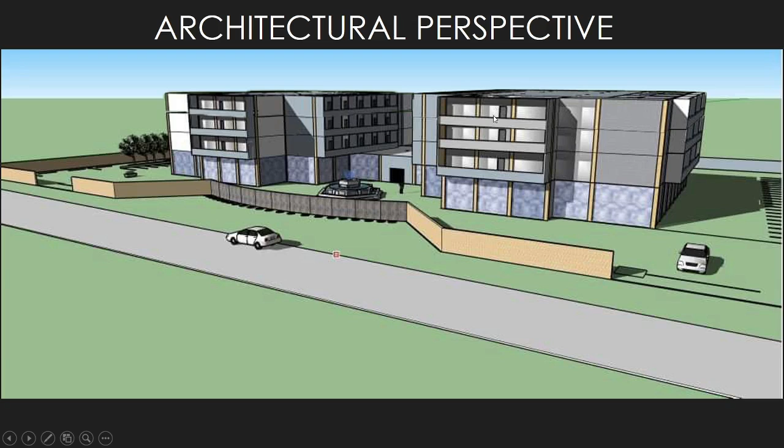So the ground floor, well, you cannot see it right now because it is shown outside. The ground floor is practically for commercial purposes. So there are stores, there's a pharmacy, there's a gym, and etc. But when you reach the second, third, and fourth floor, this is all residential. This is a standard condominium build of a structure.

So talking about the location, this building, our proposed building, is located on Diversion Road, Talomo, Davao City. So as you can see this, the vicinity map, this is the site right here. This is the road, the Diversion Road on Davao City, and here's the General Douglas MacArthur Highway. So these are the nearby landmarks on the map. On the right side here is a zoomed in version of our condominium. So these are more specific landmarks that are near the lot area.

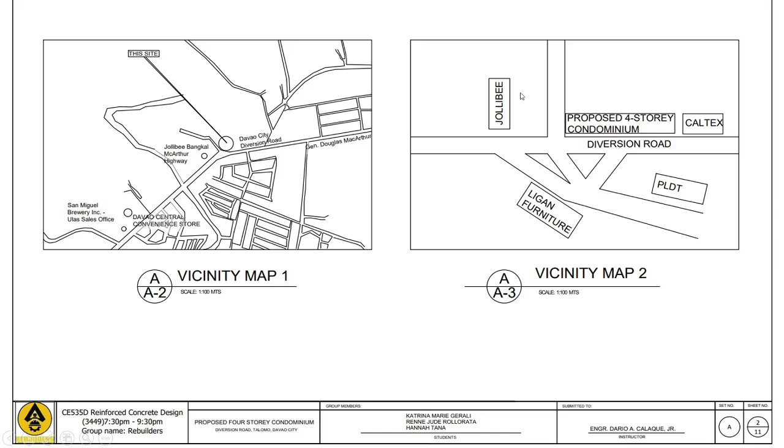So this is the site development plan. So as you can see, our lot area is actually somewhere between 2,000 square meter. We have a guardhouse here at the front and at the back. This right here is the driveway on the edges, and this is the parking area. These lines. This is supposedly a fountain, and this is the dedicated generator area. And this shaded part right here is our building.

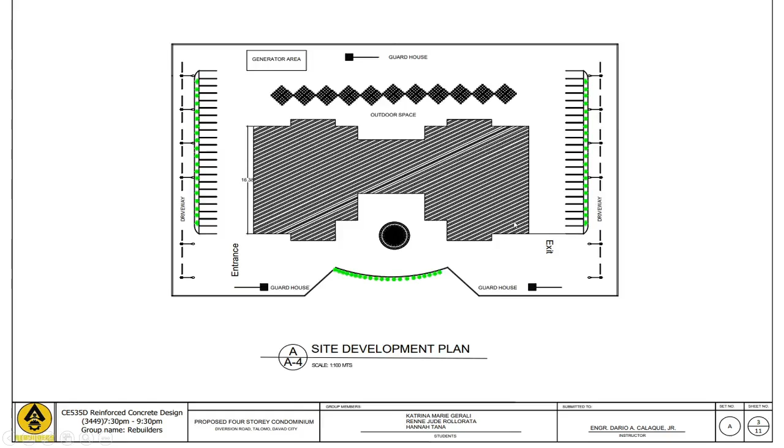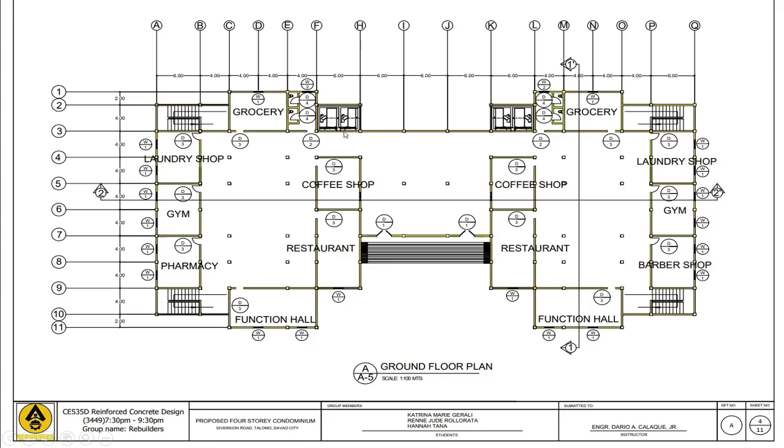So moving on to the ground floor plan. So this is the floor where it is serving the commercial needs of the people. So as you can see, there's a function hall, there's a restaurant, a coffee shop, some groceries, a laundry shop, a gym, a pharmacy, and a barber shop. As you can see in the design of our structure, it is actually symmetrical. So the left side is built and is designed symmetrically to the right side. And this over here are the stairs. There are 4 stairs. And these 2 spaces are dedicated for the elevator.

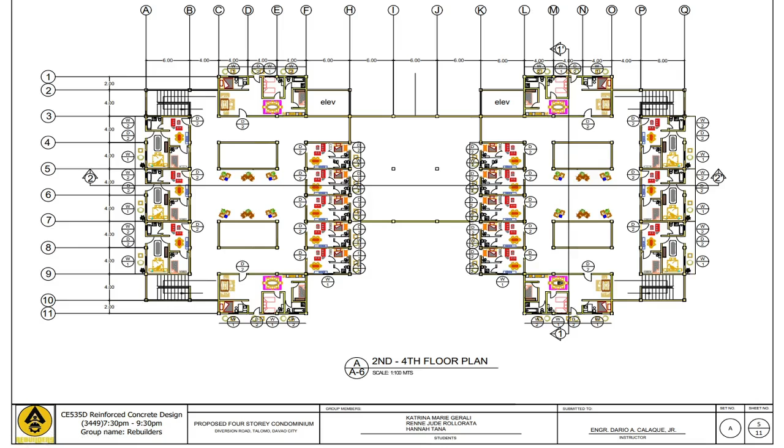So for the second to fourth floor plan, this is the residential area. So there are 5, 6, 7, 8, 9, 10. There are 10 rooms here, and there are also 10 rooms here since this structure is symmetrical. And this is the elevator. There are the stairs. So there are balconies. So this right here is a balcony. Right here. And there's also a balcony for the 5 adjacent rooms here. Here and here. So this is the same from the second to the third and to the fourth. That's why it is just compiled into one sheet.

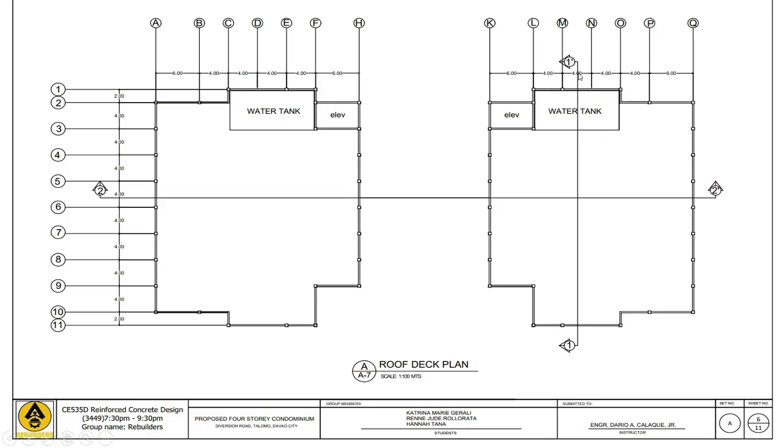Next is the roof deck plan. So as you can see, there is almost nothing here, except there's only the two spaces. These are the elevator shafts. So the elevator actually leads all the way up here. And as you can see, adjacent to the elevator wall are the water tanks. And now, as you can see, there are arrows that cut a certain section of the building. Why is that? Well, that is for the cut sections that I'm going to show you in the next few pages. So for right now, I'm going to show you the elevation.

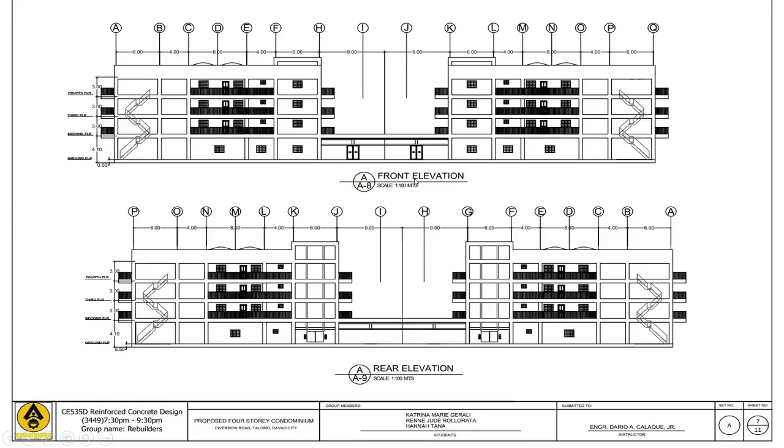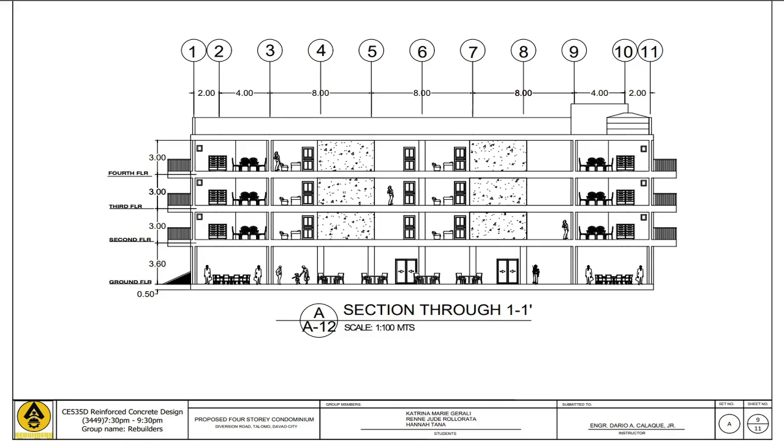Next is the cross section. This is the section of the longer part of the building. So as you can see on the ground floor, this is purely for commercial purposes. As you can see right here in both edges, these are actually the gym. These are the restaurants. And these are just the lobby, an open space for people. And for the second, third floor, it's all the same because it is residential, it is a condominium.

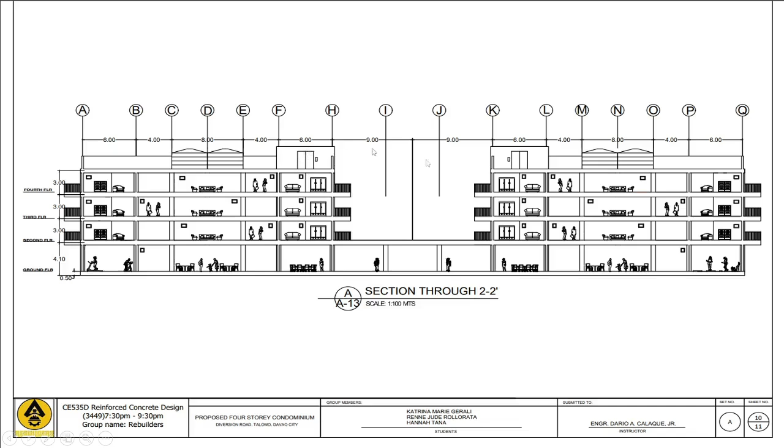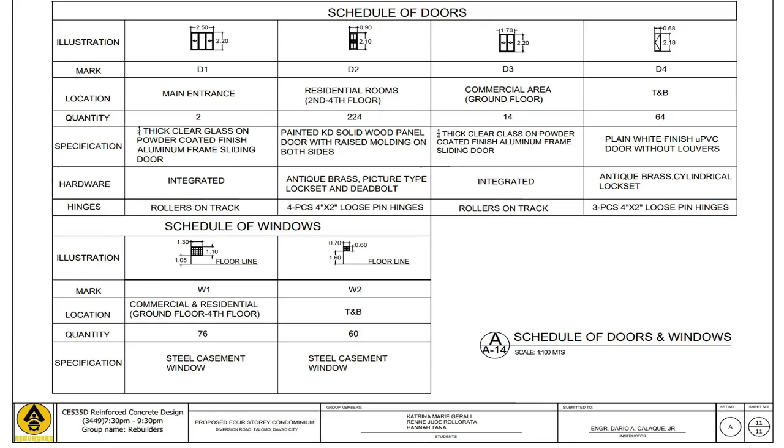So that right there on the top, that is the elevator, the top of the elevator. And this right here are the water tanks. So right now, this is the schedule of doors and windows. So according to our design, we have 4 different door designs and 2 different window designs.

Next, these are the materials that I've used. So I have created a custom 3000 psi reinforced concrete, and these right here are the following descriptions of the concrete that I've used.

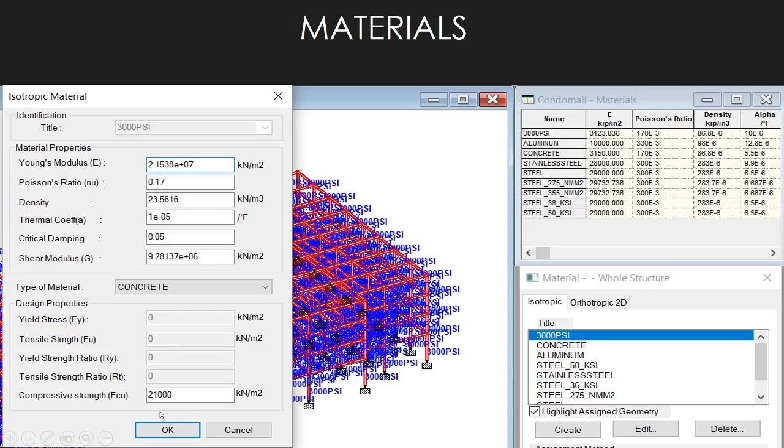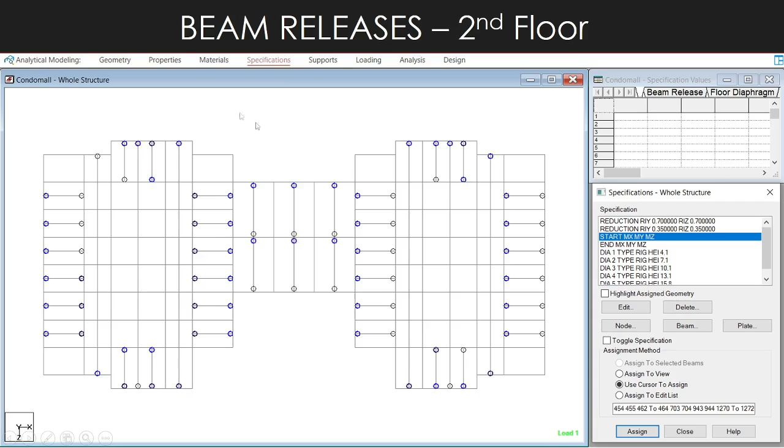And then for the third to fourth floor, it is practically the same. The same location of the beams and the same point of releases are placed for the second to fourth floor.

So part 2.2 talks about the loadings that we've put in our STAAD model. So these are our primary loads. So there are 11. The first 4 are the seismic loads. So a seismic load for the positive x-axis, for the negative x-axis, for the positive z-axis, and for the negative z-axis. The fifth one are the dead loads, while the sixth are the live loads, but this one is for the entire structure, which means that in this particular section, all the possible slabs on the building have a live load on them.

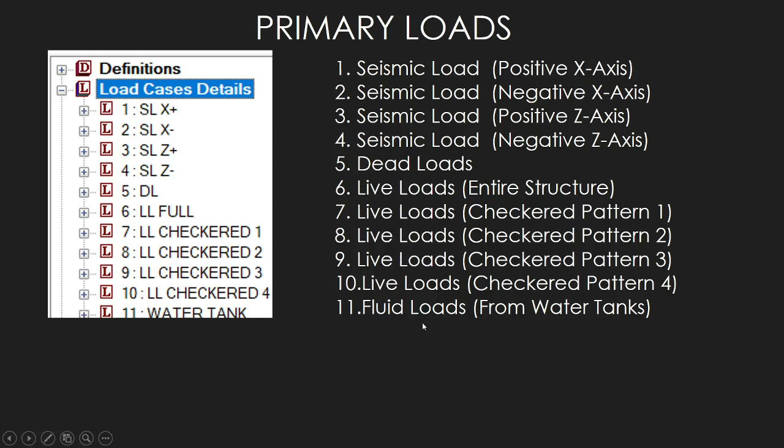While number 7 to number 10 are all live loads but are in a certain alternating pattern. I have labeled this as a checkered pattern. So there are 4. And the 11th load is a fluid load, which is generated from the water tanks that we have placed on the roof deck.

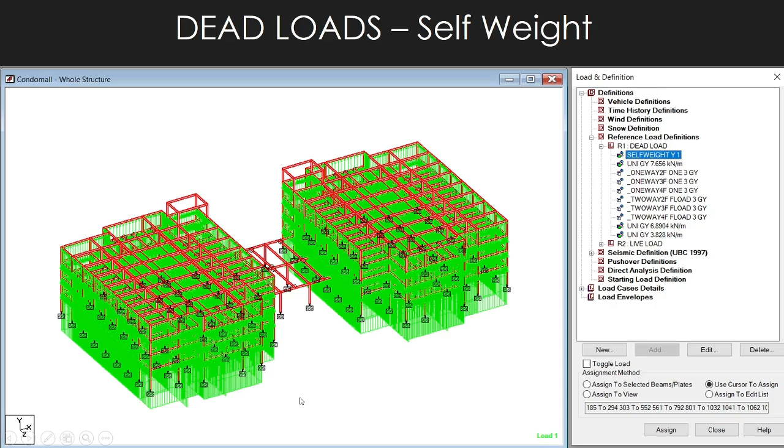So of the 11 primary loads, let us first talk about the dead loads. So the first dead load right here is the self-weight. This self-weight is applied to all the structural members on the STAAD model. The second type of dead load is a superimposed dead load. This one is on the slabs. So this is only placed from second to fourth floor.

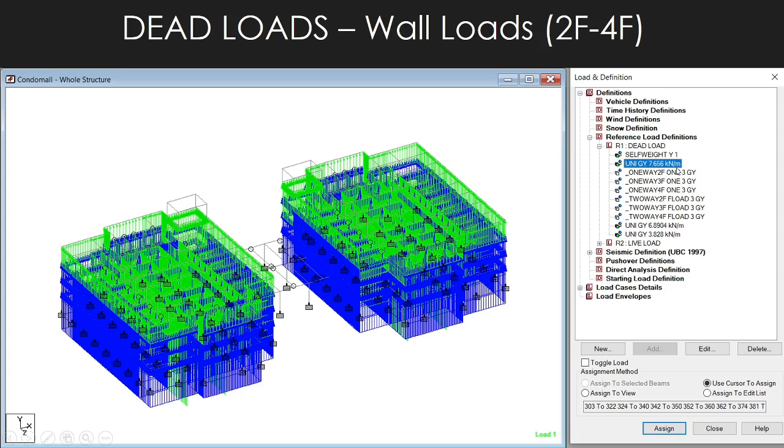And then the next dead loads are the wall loads, which are from second floor to fourth floor. So these wall loads are concentrated on the beams where there is a wall above it. So as you can see, the intensity of the wall load is 7.656 kilonewton per meter.

So the next are the dead loads, the wall loads that are dedicated at the roof deck. So as you can see in the blue arrows here, these are the beams at the edge of the roof deck, where there is a little bit of wall standing above it.

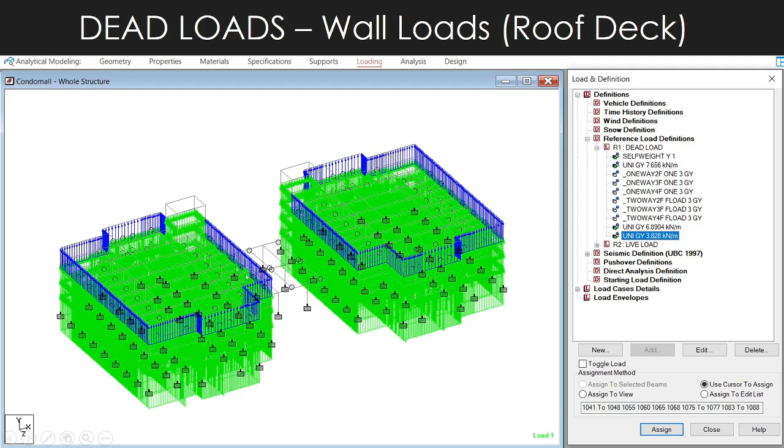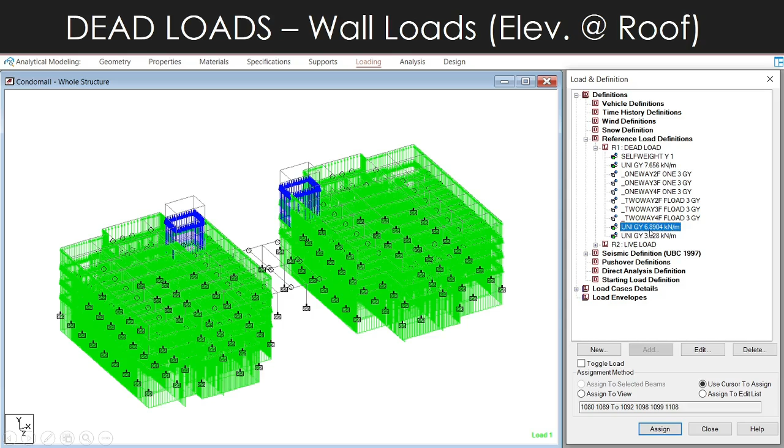And then lastly, the wall loads based solely on the elevator shaft at the roof deck. As you can see, these 4 rectangles. And you can also see their corresponding intensity. This one is 6.8904 kilonewton per meter.

So now that we're done with the dead loads, let us proceed to the live loads. So the first live loads I'm going to show you are the full version, where all the area of the building where there can possibly be a live load that can be placed, this is all considered. Now, as you can see on the table below, this is from NSCP 2015. This is the reference that we've used in determining the pressure generated by the live load on that certain slab.

So as you can see, for all the residential area, so for all those slabs that belong in the individual rooms of the tenants, we are using 1.9 kilopascal pressure. And to the roof decks, we have assigned 1.9 kilopascal as a pressure also. And for the rest of the area, on the open spaces, on the lobbies, on the corridors, we will be using 4.8 kilopascal.

So for example right here, this particular slab, this line, this is mainly on the corridor, on the public area. So we have assigned 4.8 kilopascal here. While on this group of slabs, these are all within the residential rooms. So we have only assigned 1.9 kilopascal here.

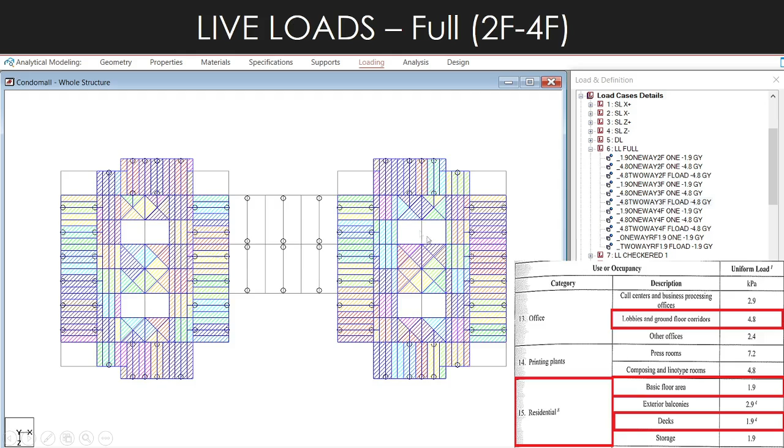As you can see, there are certain empty spaces. This right here is where the stairs are supposed to be, these 4 spots. These 2 were for the elevator. And the 4 right here that are in the middle, this is actually a partition where it is covered by walls, and there is no slab here because technically no person can set foot in this area since it is enclosed with a concrete wall.

The next live loads that we're going to tackle are the checkered pattern. So it is fairly impossible for me to show you all the possible checkered patterns for all the possible floors. So we have only taken a certain group of floors so that we can just show you the comparison. So based on the design of our checkered pattern, every floor actually has an alternating pattern of loads on their slabs. So this one is for the 2nd floor and the 4th floor. The next one is the 3rd floor and the roof deck.

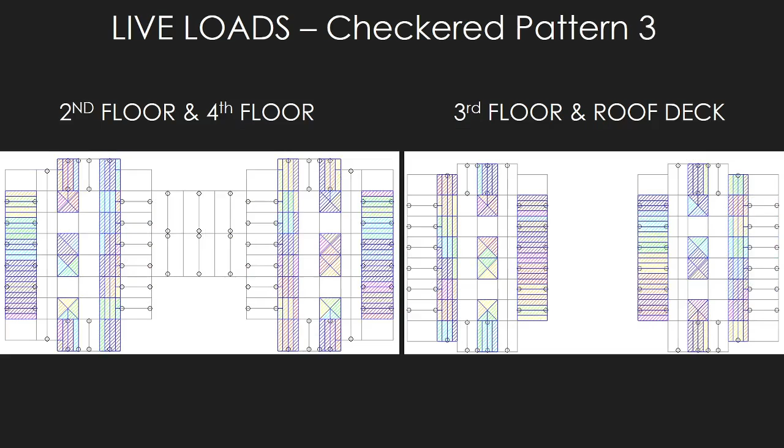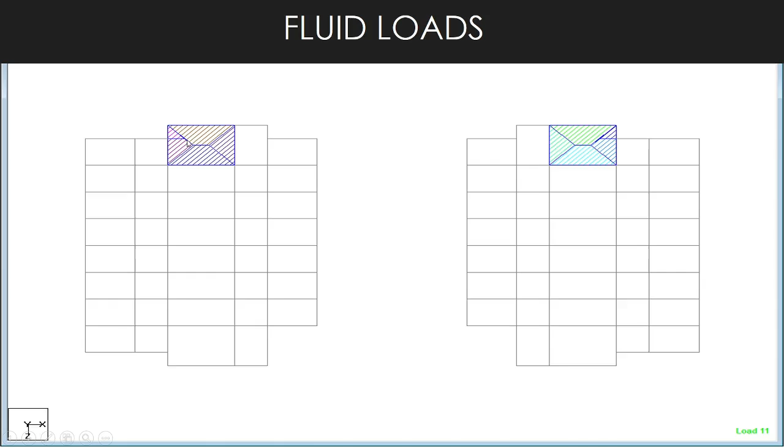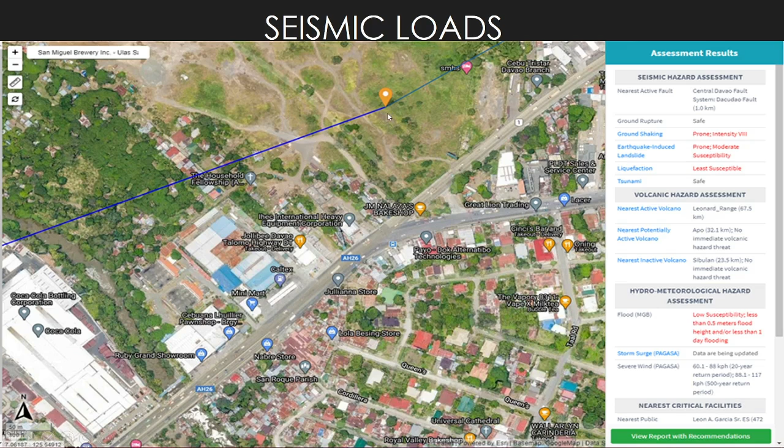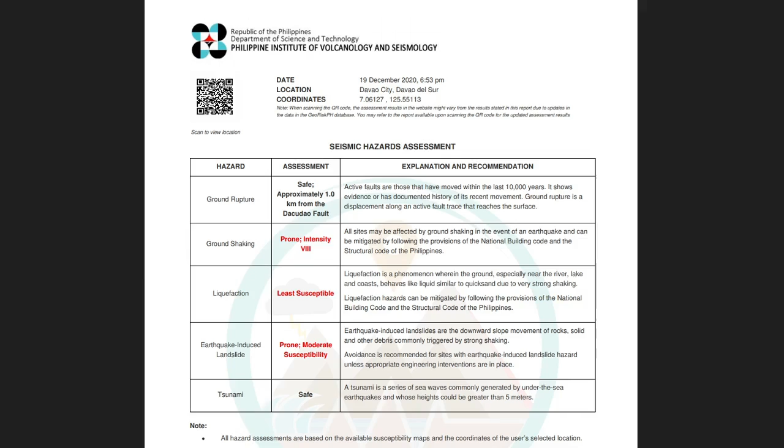So the next that I'm going to talk to you about are the seismic loads. So this is the actual area of the site. We used Hazard Hunter as a reference. So this is what the coordinates have shown. And these are the hazard assessment reports from the Hazard Hunter. So you can see that our site is approximately 1 kilometer from the Dacudao Fault. These are the rest of the assessments.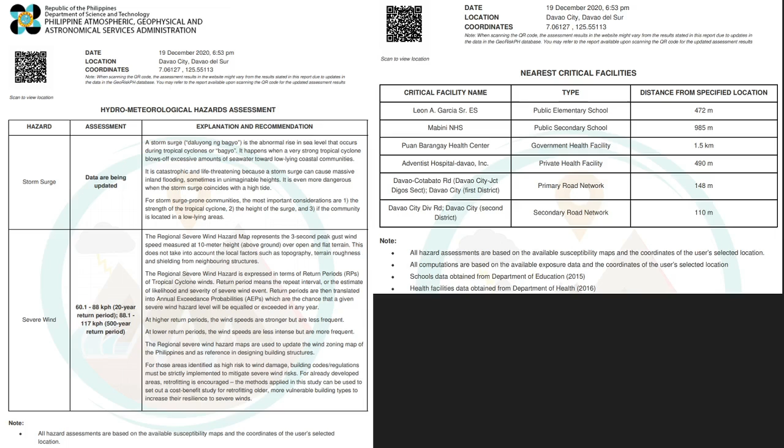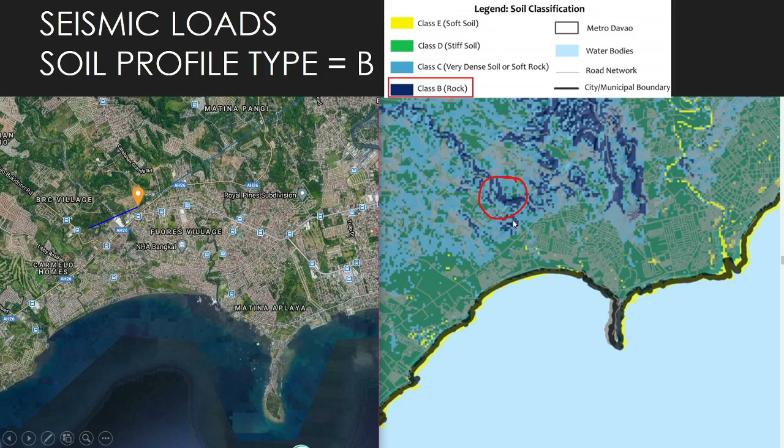Okay, now for the soil profile type. Now we used the Metro Davao earthquake model to reference the location of our site to the map that was in the earthquake model. And after a careful observation, we have concluded that our site is located on a Class B classification of soil. So these right here are the following values that we have taken from the UBC 1997.

So our site is in seismic zone 4, and this is the table taken from the UBC. And then the seismic importance factor is 1, since we classify our building as a special occupancy structure. Our seismic source is type A. And then these are our near source factors, NA and NV.

And then just cross-referencing, since we have a seismic source type A, we'll look here in the table, and since we are only 1 kilometer away from the closest fault, we will use this part on the table. So NV is 2.0, NA is 1.5.

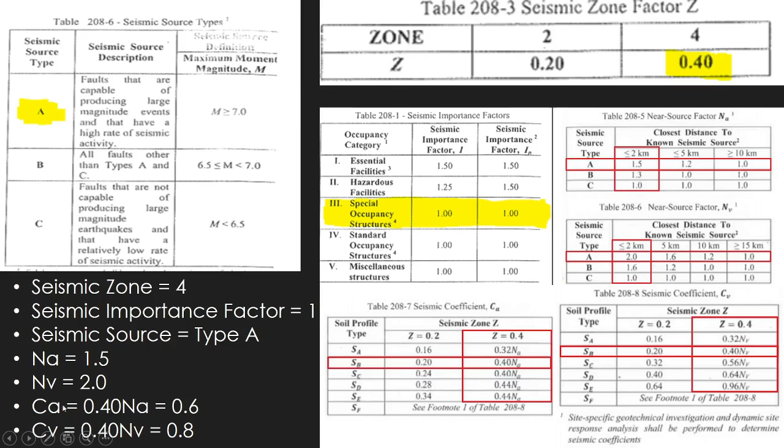And then for the seismic coefficients CA and CV, we will be getting our value based on the soil profile type. So since our soil profile type is B and our seismic zone is 4, this is the value that we should be using for the CA and CV. So calculating that, it turns out to be 0.6 and 0.8 respectively.

So now next is the selection of the earthquake force resisting structural systems. Since we will be using special reinforced concrete moment frames, the response modification factor R is 8.5, and the amplification factor omega O is 2.8.

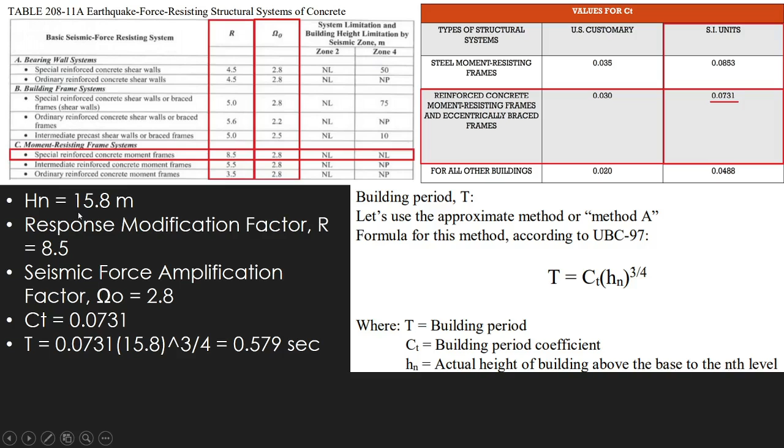And then for the value of our building period coefficient CT, since we use reinforced concrete moment resisting frames and we are using SI units, this is our coefficient 0.0731, and this is the formula of the building period. Using this formula, we can calculate our building period. By the way, H sub n is the actual height of the building above the base to the nth level, and we have counted that as 15.8 meters. So the building period is 0.579 seconds.

Next, we will do a manual solving for the base shear. For the total design base shear, this is the formula. These variables right here, we already have the values. For the W, the weight, I have calculated that the weight per floor sums up to be 84,483.56 kilonewton. Plugging that into the formula, we have found that our base shear is 13,732.977 kilonewton. And that's not yet the final answer. We still have many assessments to do.

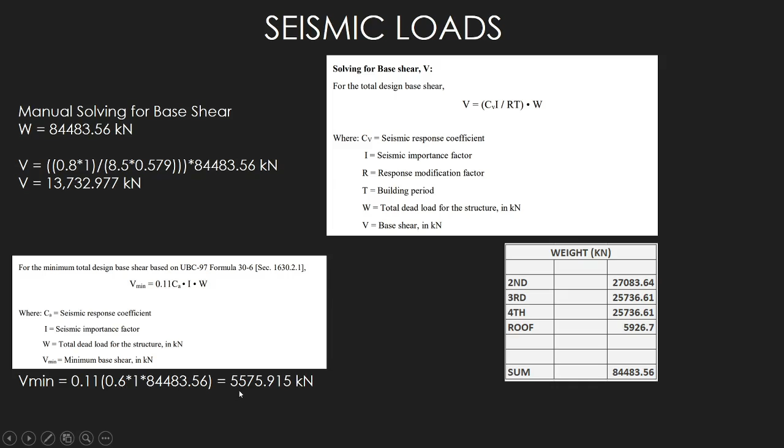Next we will solve for the minimum base shear. This is the formula, and once again we plug in the variables we already have. Thus, we get a result of 5,575.915 kilonewton. Next is the minimum base shear on zone 4. Our answer is 6,361.115 kilonewton. And for the maximum base shear, it is 14,908.864 kilonewton. In conclusion, since our calculated total design base shear falls between the minimum base shear on zone 4 and the maximum base shear, this value governs.

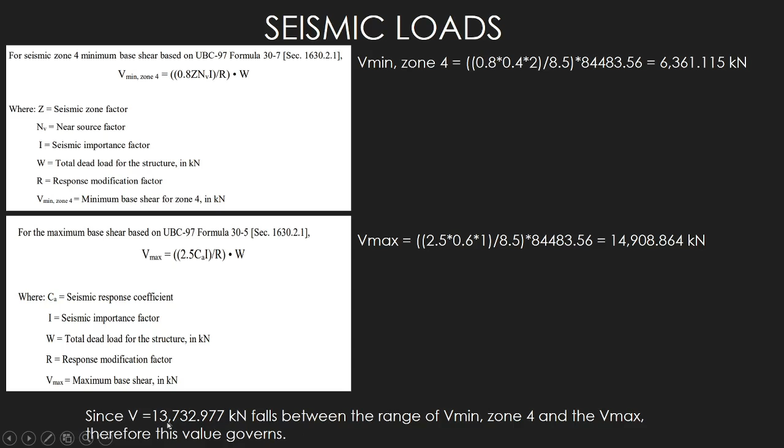Now we are going to compare that to the base shear value from our STAAD model. According to our STAAD model, our base shear is 8,984.467 kilonewton. Compared to the one we calculated, there is a difference of 4,748.51 kilonewton. Since 8,984.467 falls inside the range of the minimum base shear on zone 4 and the maximum base shear calculated before, this value is also valid. The value from STAAD and the one we manually solved are different, but they all fall inside the range of validity.

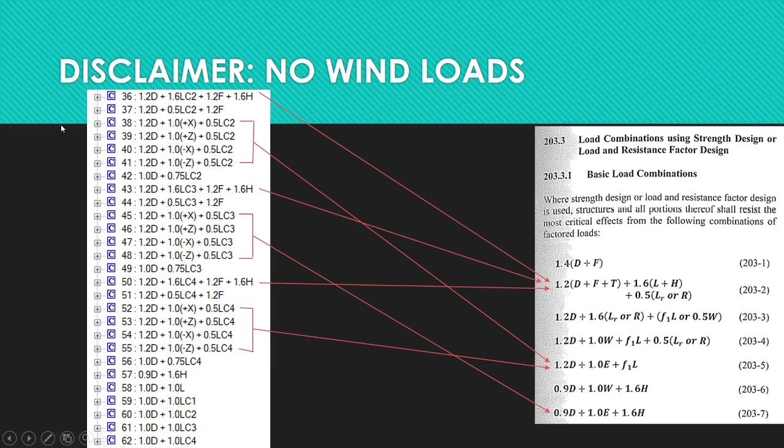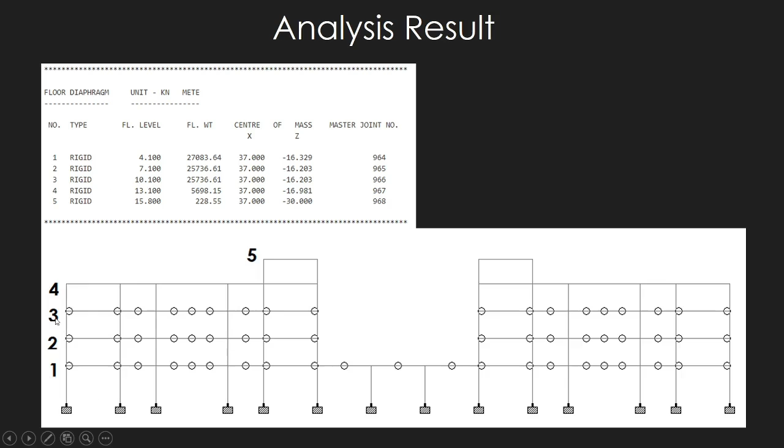Part 2.4 is the analysis of the result of our STAAD model. This is our analysis result. When we ran the analysis, there were 0 errors and 0 warnings, which is good. When we view the output file, we can see that I've placed 5 floor diaphragms, one in each floor level: 1, 2, 3, 4, and 5. And in our soft story check in the output file, it concluded that no soft story was detected. So it is all good.

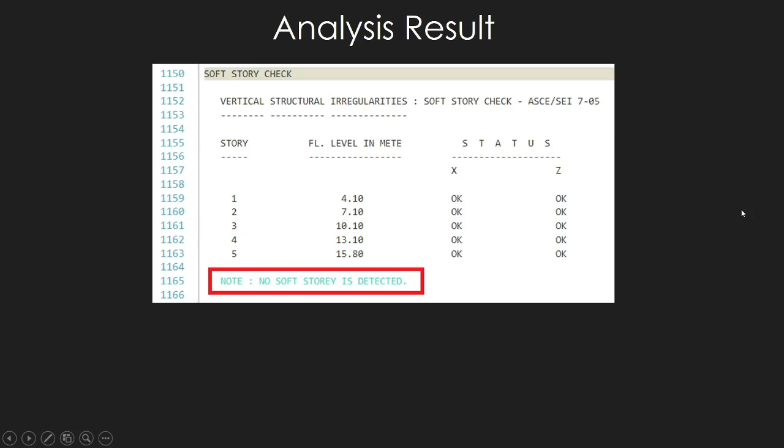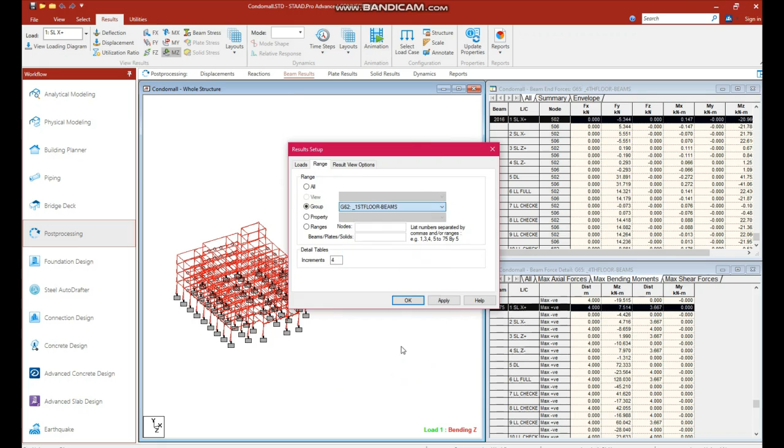We have just finished discussing everything about our STAAD design. This time we will discuss our design of beams. To design our beams, first we go to post-processing after running our analysis and go to our beam results. Now to show only our second floor beams, we apply the group that we have assigned for that, and we go to beam results and summary.

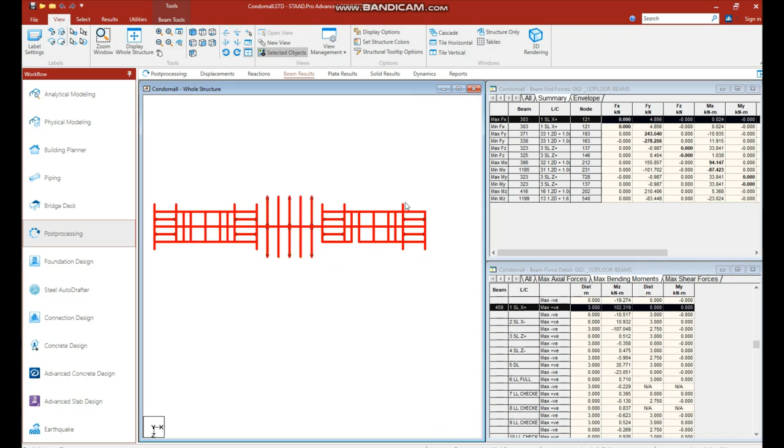So this shows only our second floor beams. We have chosen beam 416 because it has the maximum moment of all; we choose the greatest moment in the summary. From beam 416, we have this data right here, copied from the STAAD editor. It automatically tabulated the left, middle, and right maximum moments, as well as the left and right shears, and gave us a summary. So we just input the maximum moments for left, middle, and right over here.

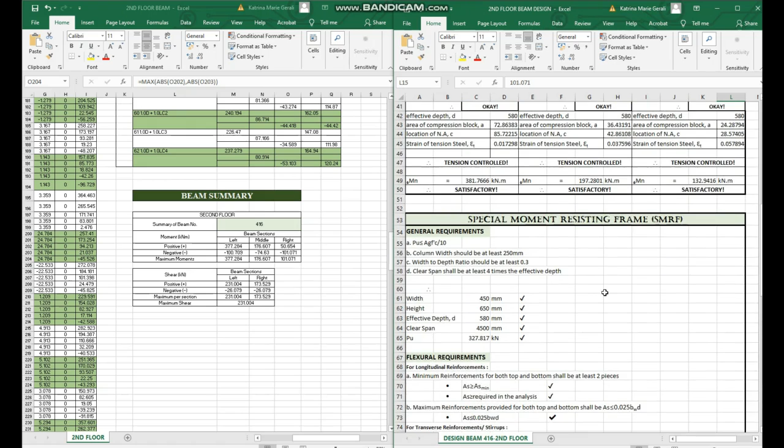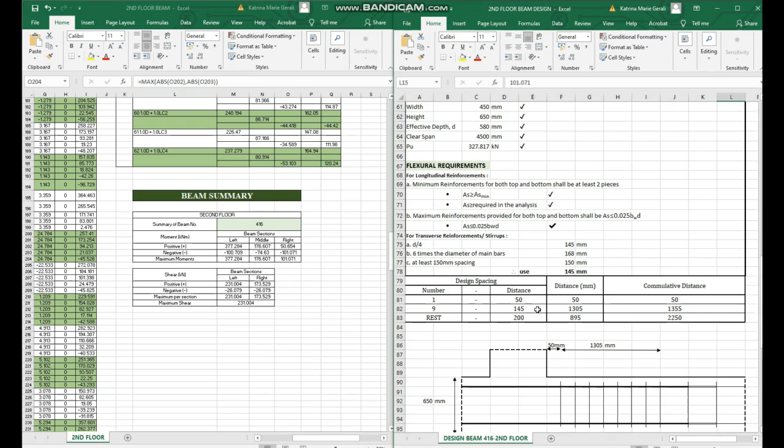And it will automatically give us the data that we need for this beam. So we have a variety of options here, the diameters and how many numbers of bars. So in this beam, we chose to use 20 millimeter diameter bars. Seeing that it is okay and deemed satisfactory for the tension control, we then proceed to designing our spacing of stirrups. So it will automatically meet the conditions here, and we will use the spacing there, and so that is the spacing of our stirrups.

It will give us the whole summary of the design of this beam for our second floor. The dimensions, the strength of the concrete, steel, number of bars, diameter of bars, the strength of our ties, and the spacings of our ties, our stirrups.

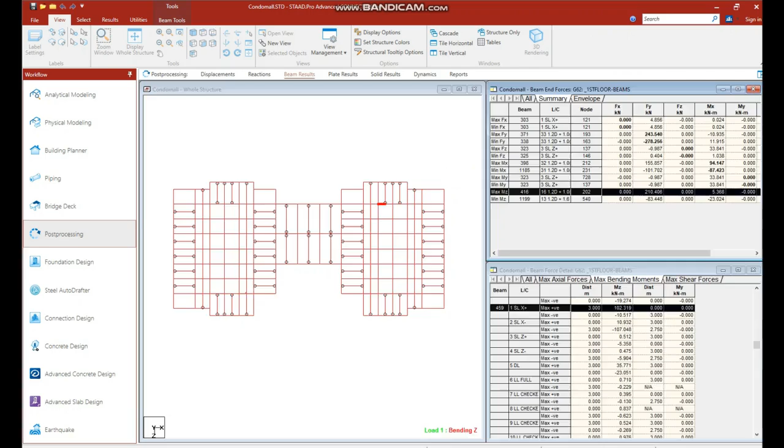Okay, and so we will now continue. We will repeat the same process. Now we go to our third floor beams. And we will separate there our third floor beams. There. So we chose to analyze beam 1305.

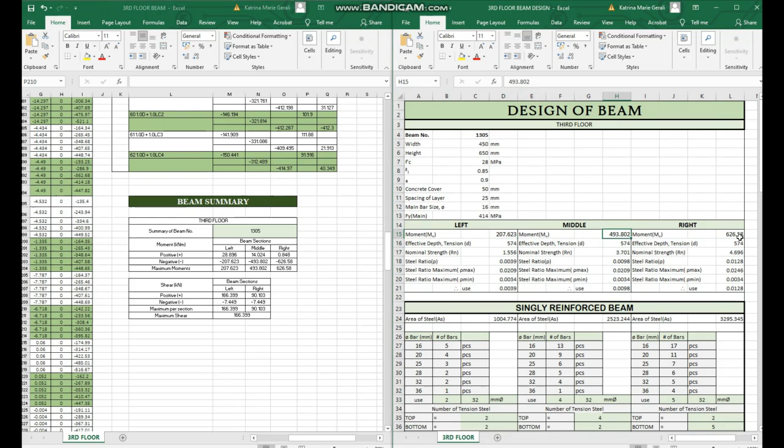Now for our third floor beams, beam 1305, again we just got our information from STAAD editor here, and it automatically tabulates the left, middle, and right moments, as well as the left and right shears. So below it will give us a summary of what moments we will use. All right. So here we just input our left, middle, and right maximum moments, and again it will automatically give us the data that we need.

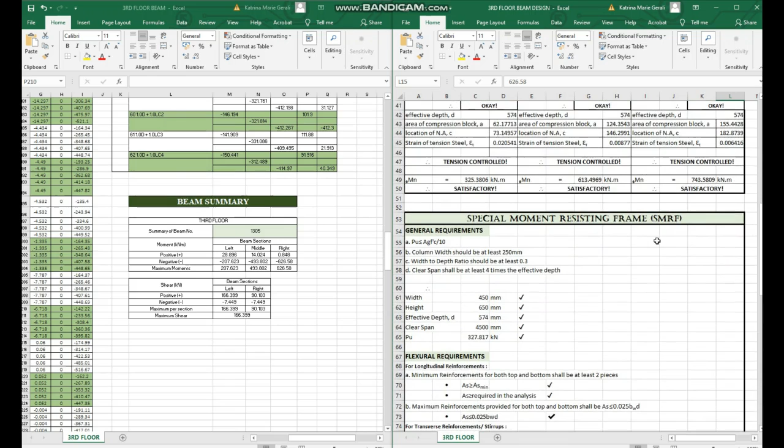So in this case we chose to go with 32mm diameter bars. Seeing that it is okay and satisfactory for tension control, we proceed to design our stirrups. So this is the spacing that we use, and automatically this is the spacing for our stirrups. Therefore, it will give us this summary for beam 1305.

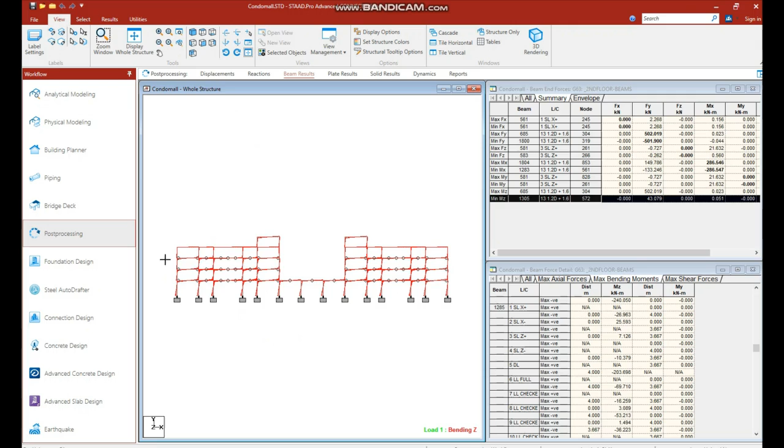And we will continue to our fourth floor beams. Okay, again to show you. Okay, so these are our fourth floor beams. There. All right, so we again apply the group that you have labeled, and we chose to go, yes, okay, there. So we chose to go with beam 1402.

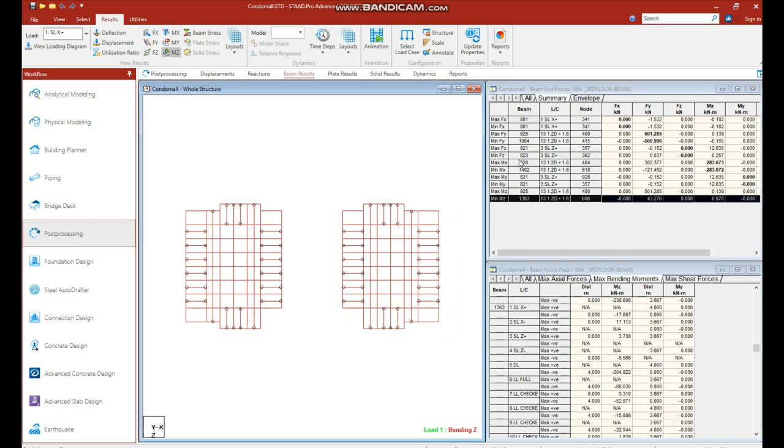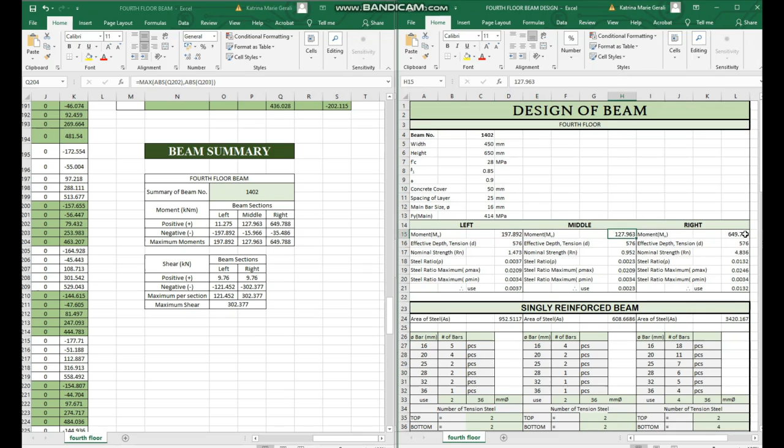Now for that, you can see the tabulation of our data here. There. Okay, and it will automatically tabulate the maximum moments for the left, middle, and right, as well as the left and right shears. Now from this information given, we just apply it here. For the left, middle, and right, it will automatically give us the data that we need.

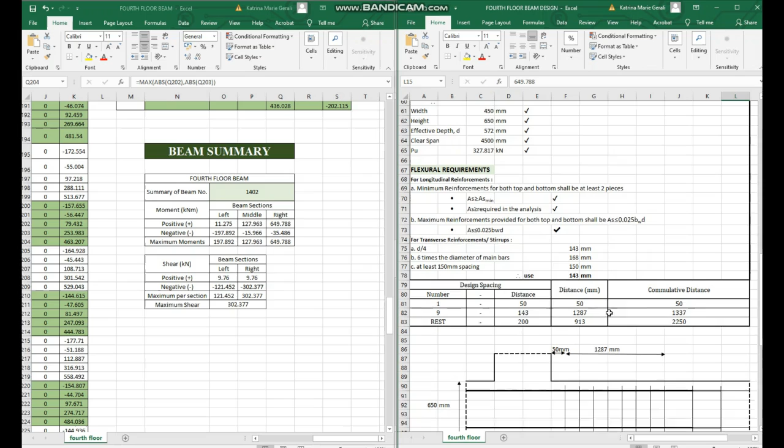So we chose to go with 36mm diameter bars for this beam. And seeing that it is okay and satisfactory for tension control, we proceed to design our stirrups. And it will automatically give us the spacing that we need. Therefore, this is the spacing of our stirrups. And we have reached a summary here of all the information that we need for beam 1402.

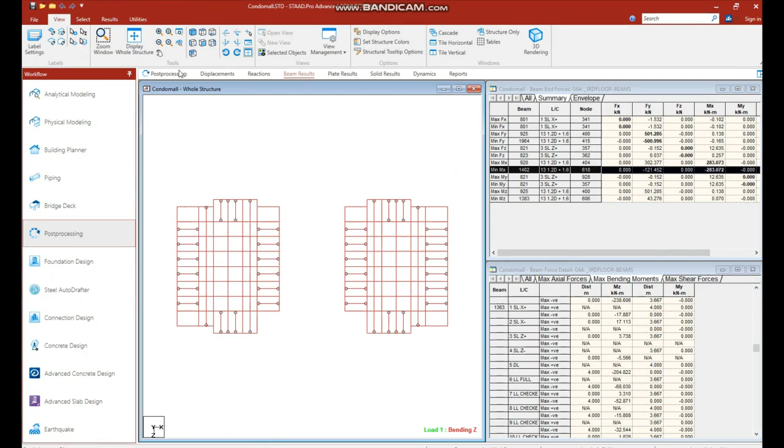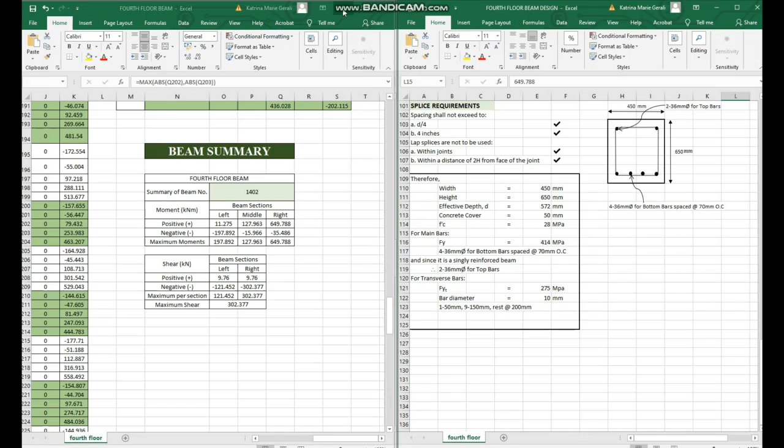Same goes for our roof deck beams. So just to show you everything, we select our fourth floor beams, or our roof deck beams rather. Okay, all right, there you have it. And we chose to analyze beam 1475.

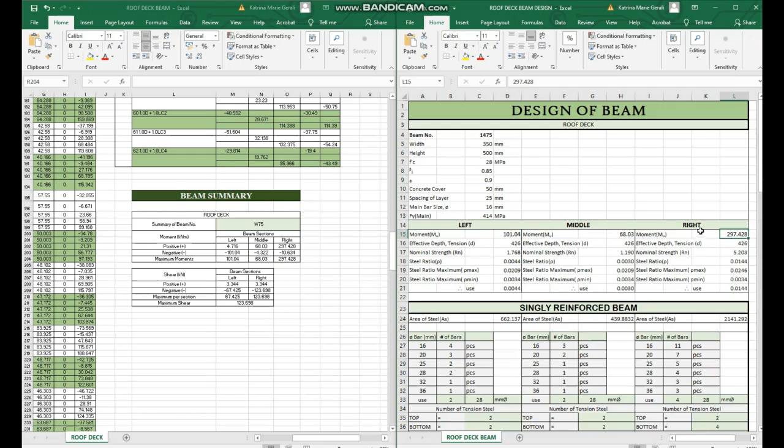So as you can see again, it has tabulated all the maximum moments for the left, middle, and right, as well as the left and right shears. And we are presented with this information below, and we just easily input it here for our maximum left, middle, and right moments. It will give us this data. So we have chosen to go with 28mm diameter bars.

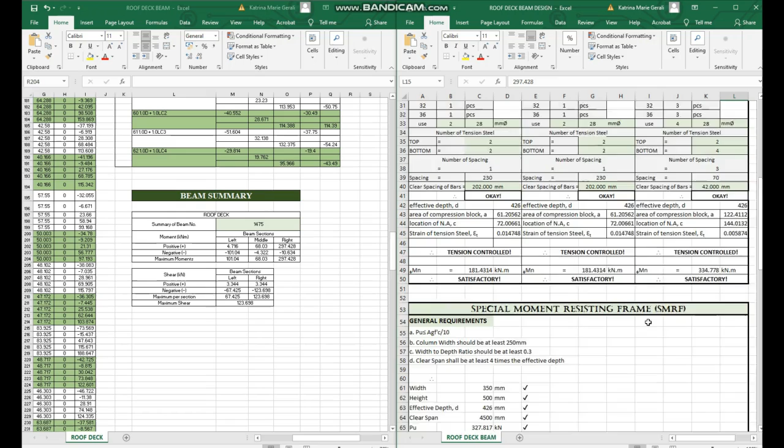Seeing that it is okay and satisfactory for tension control, we proceed to design our stirrups. So it has given us this spacing, so we use that, and these are the spacings for our stirrups here.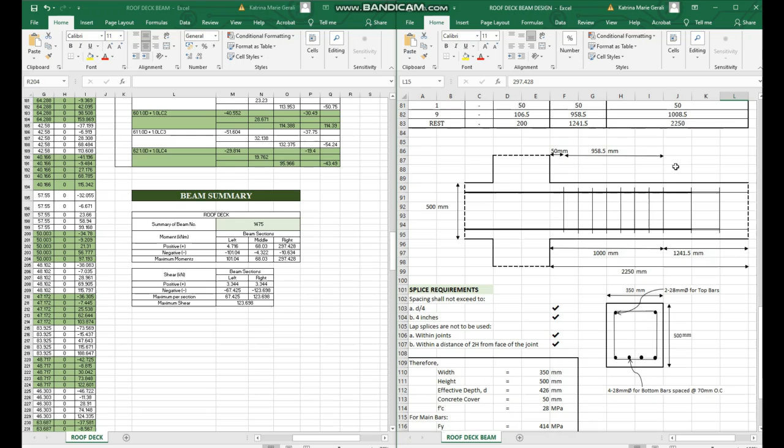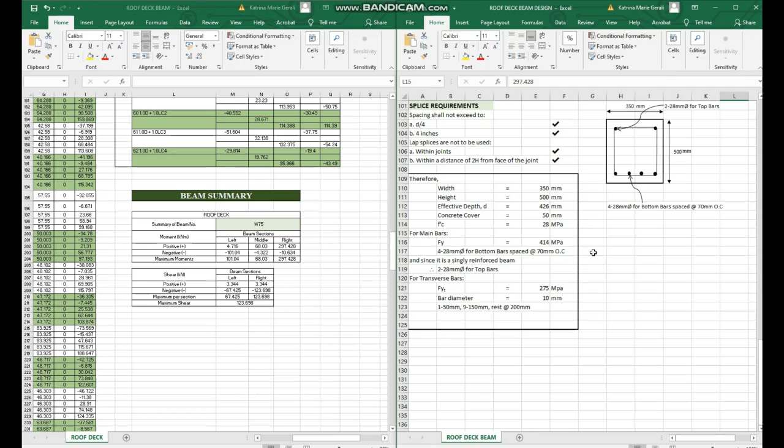Okay, so it will automatically give us the summary of the dimensions of the beams, the strength of our concrete, the strength of our steel, how many bars of steel we will use, the diameter of our bars, our stirrups, and the spacing of our stirrups. So that concludes how we design our beams.

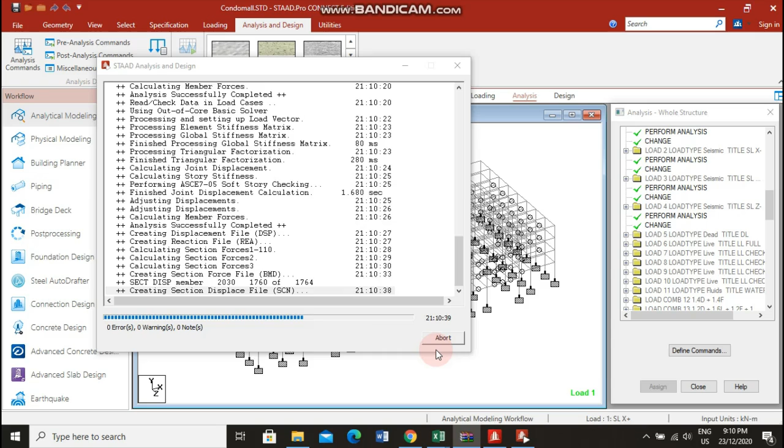So, kapit na siya. You should always run the structure before mag next process or sa may next yung nabuhaton. So, no errors, you have 0 warnings and 0 notes, so it's okay lang.

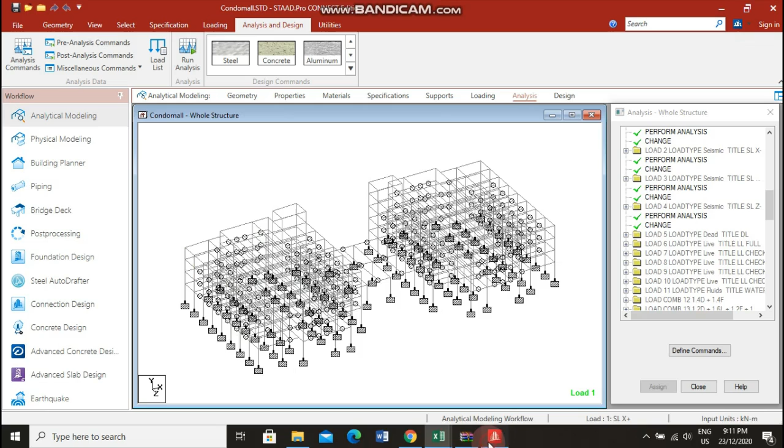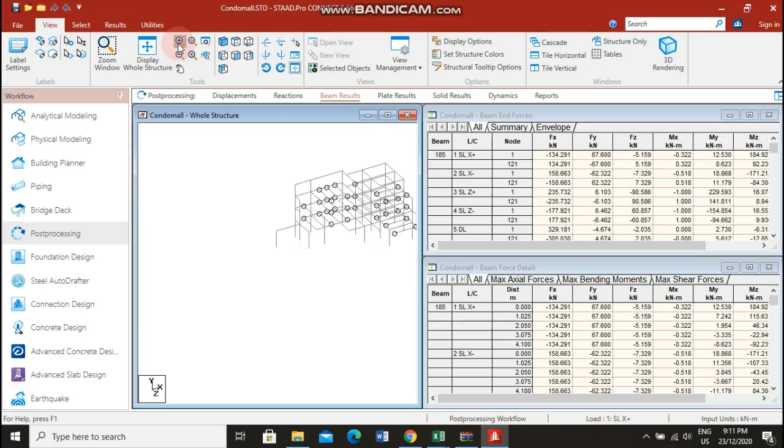Next, so for me, ang nakatask ako is mag-design sa column. First is, we need to tabulate. Ibanera naman natin siya. So, we can go to post-processing. Okay. Then, mag-go tayo sa results. Kung sa beam. Pero diri sa pagkuha na ko sa moment sa mga column. So, isa-isa na ako na siyang tanaw. First floor, second floor, third floor, roof deck, nga na gani.

So, mo to nakabuhat ko tabulation gamit ang Excel. So, dahil kani siya for beam 186. Beam 185, 186. So, ang iyahang MZ is 183.195. For MX, we have negative 0.322. And for MY, 13.706. So, kani LC is the load combination. Our distance for this is our FX, which is ang PU, then MY and Z.

So, using Excel formula na diriam. So, nakagetag maximum PU, max PU, max MY, max MZ. Then, also, by Excel formula, nakagawa na to ani from sa beam 186. So, kani itong maximum PU. Then, mauni siya ang load combination na na-form. So, ang load combination, nakakuha tawag load combination para makuha ang maximum PU and na-solve na daan siya sa STAAD.

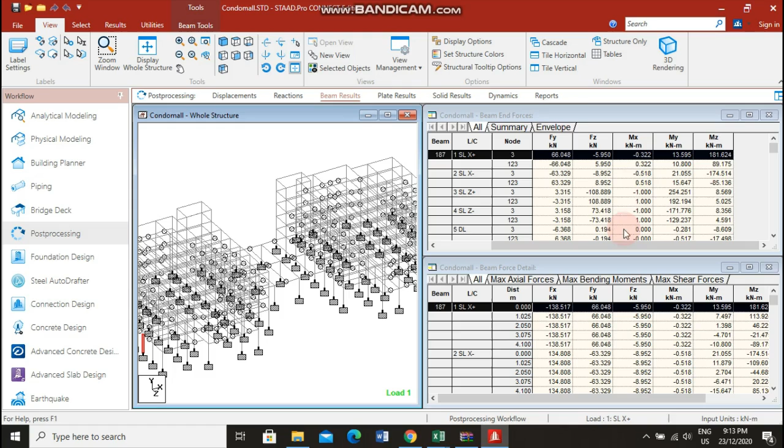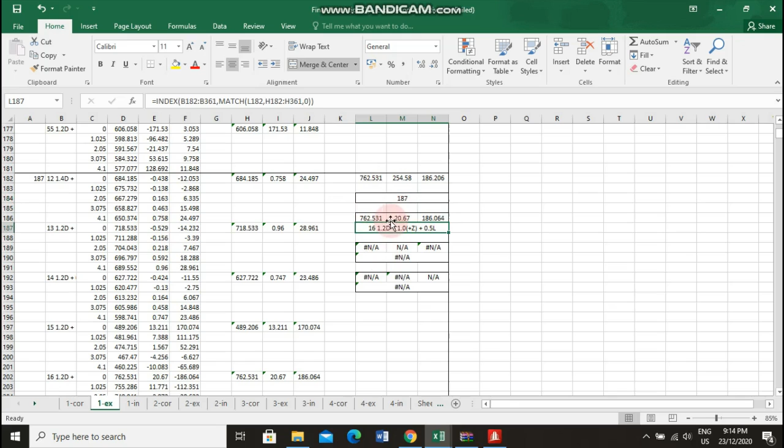So, next beam is kani siya is for the first floor exterior. Next is same process lang yapon magpili tag beam 187. So, beam 187, we have the MZ na 181.624, MY 13.595, and MX negative 0.322. Then, so magtabulate na kita. Ganito siya ang distance, load combination, distance, Fx, My, Mz. So, maximum mga PU nakuha, maximum MY, maximum MZ. Then, using Excel formula, nakakuha na ito ani. Then, under sa beam 187. So, therefore, nakabuo ang load combination na kani sa pagkuha na natin sa maximum PU. Then, for exterior na siya.

For interior naman, we have for beam 195, same process kaya po siya. We have our load combination here. The distance, Fx, My, Mz. Then, makuha natin ni siya. Then, under siya sa beam 195, naka-formulate og load combination na kani. Same as sa second floor exterior. As you can see. Then, second floor interior. Beam 447, naka-formulate ang load combination na kani, and we have our maximum PU na 621.11. For our third floor exterior naman is we have here. Then, for the third floor interior, nag-prevail is ang maximum PU na 729.33. Under sa beam 760, naka-formulate ang load combination na kani.

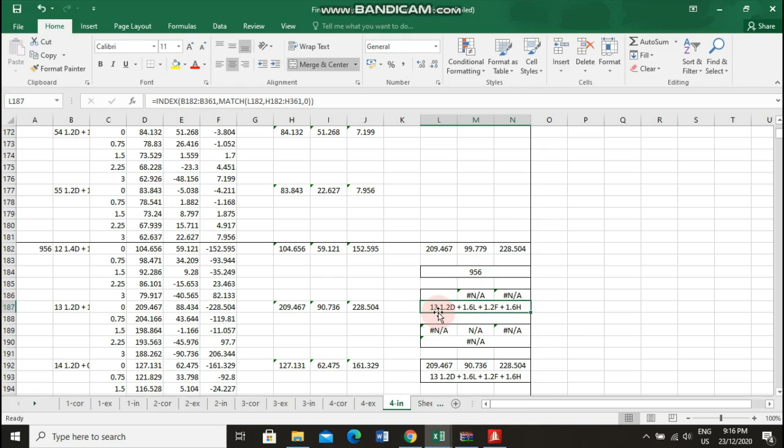Next is for fourth floor, the roof deck exterior. As you can see, same process lang gihapon siya. Then, naka-formulate og under sa beam 946, 109.763 na maximum PU, then load combination na kami. And lastly, for the interior, under beam 956, nakakuha ta og maximum PU na 209.47. Then, we have a load combination of this. So, therefore, makakalculate na ta og, makadesign na ta og columns.

So, sa pag-design sa column, magpili ito dito o unsay pinakadako na PU na nakuha. So, for first exterior column, we have 816.171 kilonewton na PU. FC prime is 28 MPa, Fy 414 MPa. Then, FYT is 275. Then for our phi is 0.65. Then concrete cover 50 mm. So, kuha na to na siya ang AG. Then, pag makuha na sa AG, ay nata. Then, so we get 329 mm. So, therefore, we will use 500 mm, assume na lang siya. Muna na siya pinakadako na assume na to.

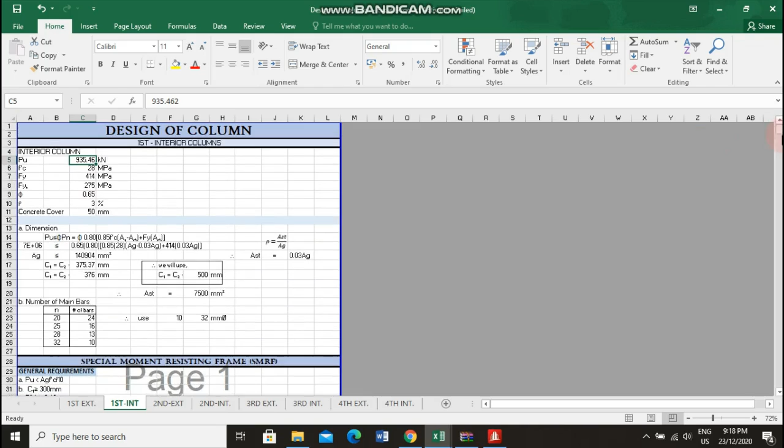So, for first exterior, next is katong gihapon, magkuha gihapon ka o pinakadako na PU under sa first interior columns, then makasolve na dahil ka sa column. For C1 and C2, number of main bars. Next is exterior floor. Same process, pinakadako na PU. Then we have our concrete cover na 50. So, we can get the AG na 108,634 mm squared. Then, also, we will use the 500 millimeter.

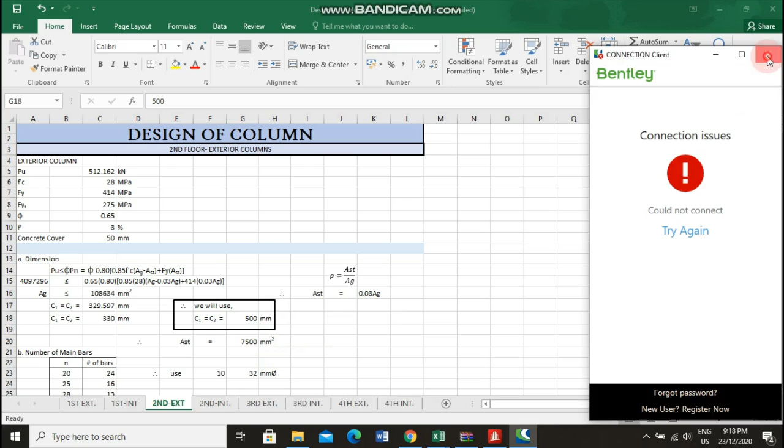Next is the second interior column, same as the third exterior columns, third interior columns, fourth exterior columns, and always remember nga in order for us to design a column, magpili ra ta pinakadako dito na PU under sa atong i-tabulate. So be careful in tabulating kasi minsan mamislook pa ba. So that's all. Thank you.

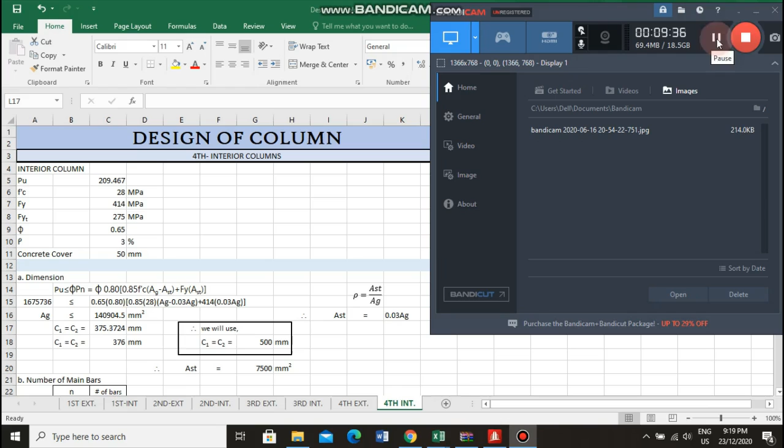By the way, so dili na ko mag-worry about sa PU kay na-solve naman daan siya sa STAAD. So, pani siya itong inunang ko dali. Diba? Post-processing. Sa beam results, then, kung ano na siya from.

So I guess all of my other group mates have done presenting their part. So this is the conclusion of our presentation of our proposal.